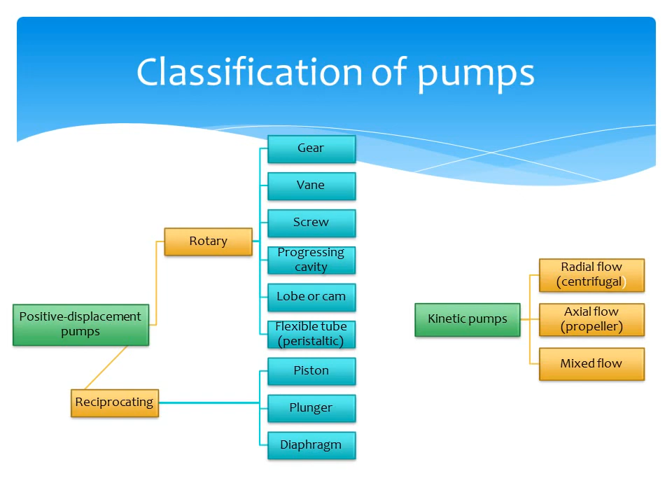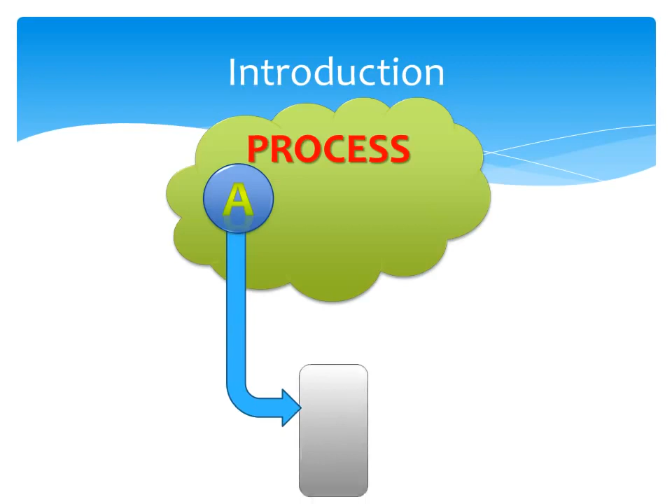The positive displacement pump is in some ways an even simpler device to control than the centrifugal pump discussed previously. It has the same function, namely to provide the pressure necessary to move a liquid at the desired rate from point A to point B of the process.

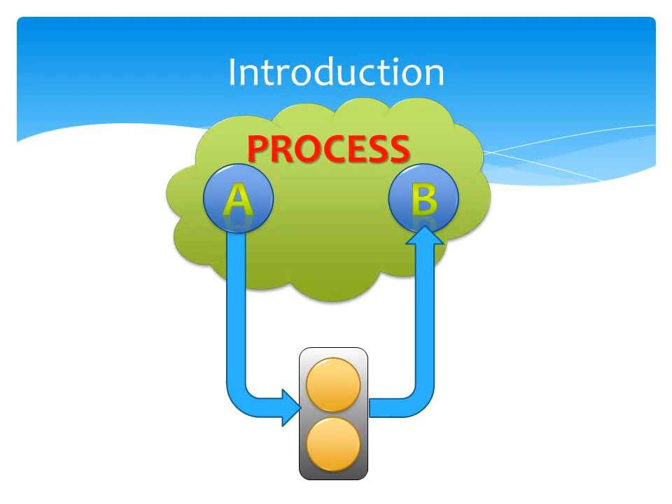The figure shows a generic process with a positive displacement pump connected to deliver liquid from A to B, in this case a gear pump.

Their characteristic curve is so simple that it is rarely drawn. The point at which the system curve and the pump performance curve intersect is the condition of operation. Typically, a system curve will require higher pressures for higher flow rates.

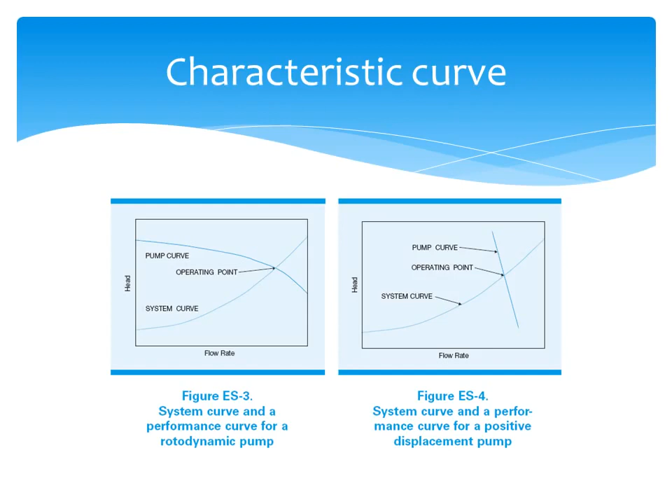Centrifugal pump performance has reduced flow with increased pressure. The slopes of the two curves are opposite. If the slopes are both gradual, the angle of intersection will be small.

Minor variations of resistance to flow, such as a partially clogged strainer or valves, will shift the point of intersection over a range of operation.

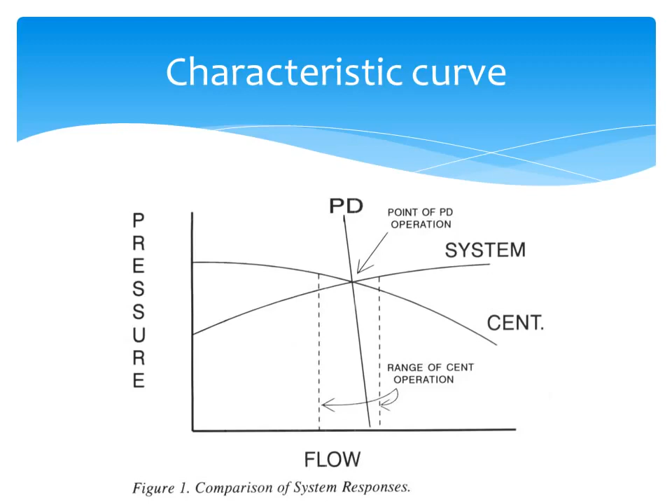PD pumps have a nearly vertical performance curve and, therefore, always intersect the system curve at one point. Minor variations in system resistance do not alter the flow.

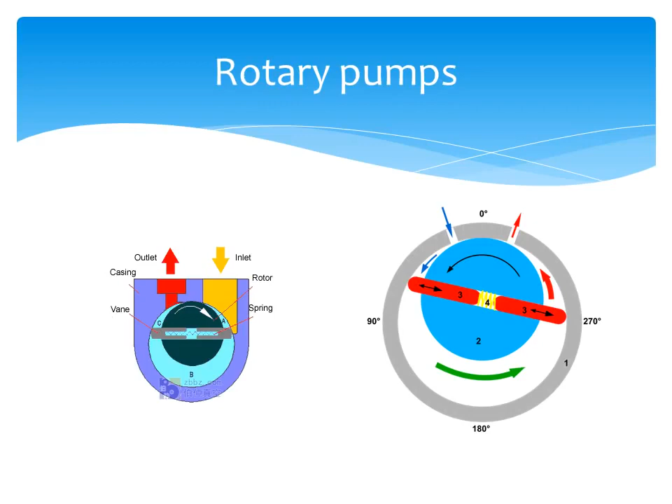Rotary pumps are defined as being vane, piston, flexible member, lobe, gear circumferential piston, or screw pumps. In all of the rotary designs, the chamber is created progressively through rotation of the drive shaft. There may be one or more chambers opened per revolution depending on the design.

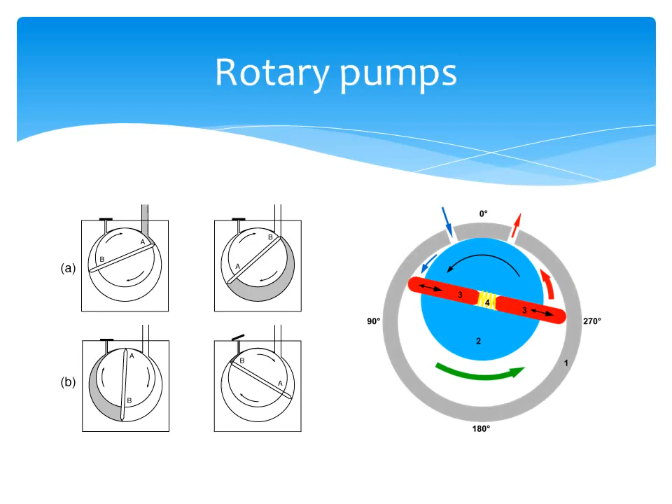The chambers are sealed off from suction by close clearance between the rotor and the housing, or by close clearance between intermeshing rotors. Rotation of the shaft moves the chamber along the bore or housing towards discharge.

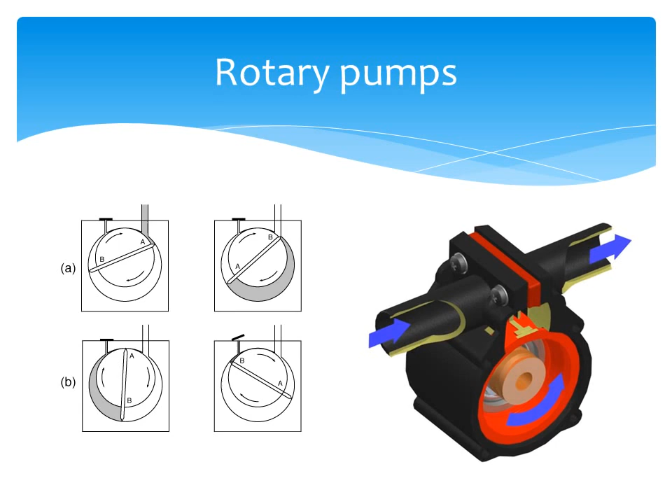The chamber is displaced to discharge by rotation. The release to discharge progresses with rotation, as the volume is expelled so that the flow is typically pulsation-free.

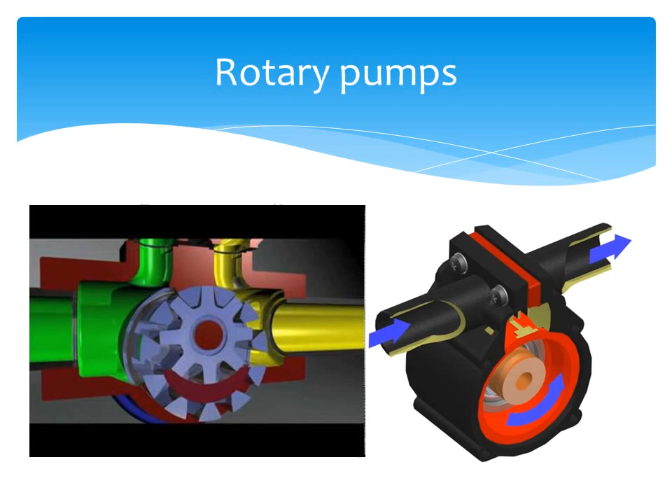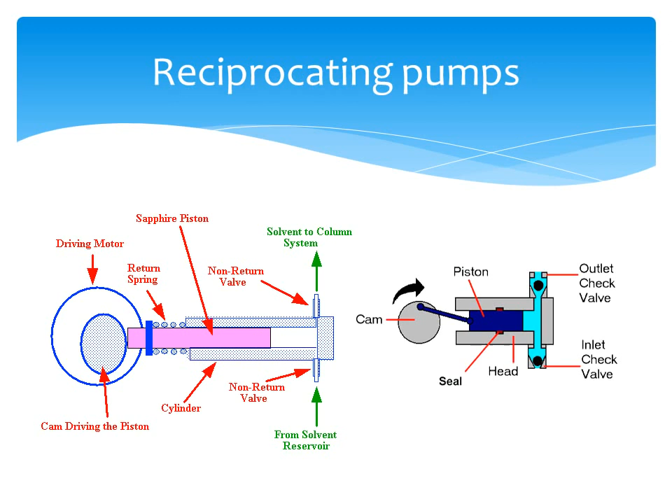Reciprocating pumps are defined as being steam, power, or controlled volume pumps. In all reciprocating pumps, there are check valves on the suction and discharge. Fluid flows through the suction valve and into the chamber as the plunger, piston, or diaphragm recedes.

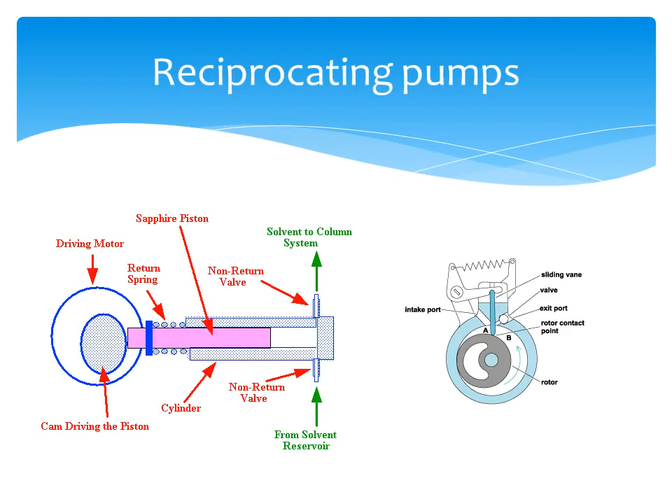At the end of the stroke, the chamber is at its maximum size. The suction valve closes, the plunger moves forward into the chamber, forcing the fluid out the discharge valve.

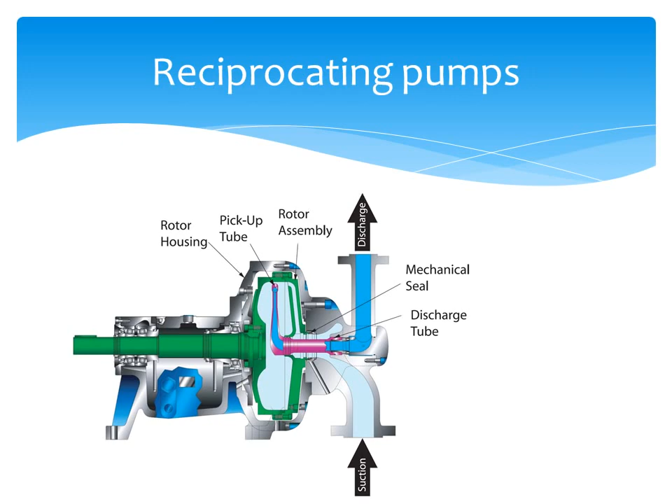The flow from each chamber is a pulse flow. If the pump has several chambers, they are timed to have sequential pulses, to minimize the overall pulsation.

As the gears rotate, they separate on the intake side of the pump, creating a void and suction, which is filled by fluid. The fluid is carried by the gears to the discharge side of the pump, where the meshing of the gears displaces the fluid.

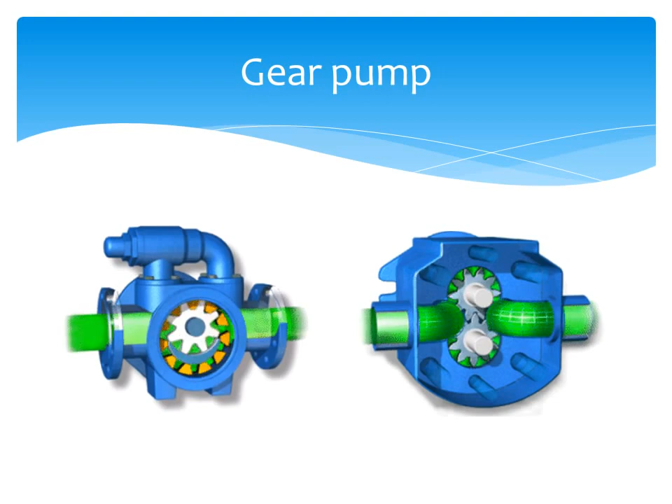The mechanical clearances are small, in the order of 10 micrometers. The tight clearances, along with the speed of rotation, effectively prevent the fluid from leaking backwards. The rigid design of the gears and housing allow for very high pressures and the ability to pump highly viscous fluids.

Lobe pumps are similar to external gear pumps in operation in that fluid flows around the interior of the casing. Unlike external gear pumps, however, the lobes do not make contact. Lobe contact is prevented by external timing gears located in the gearbox.

Pump shaft support bearings are located in the gearbox, and since the bearings are out of the pump liquid, pressure is limited by bearing location and shaft deflection.

As the lobes come out of mesh, they create expanding volume on the inlet side of the pump. Liquid flows into the cavity and is trapped by the lobes as they rotate.

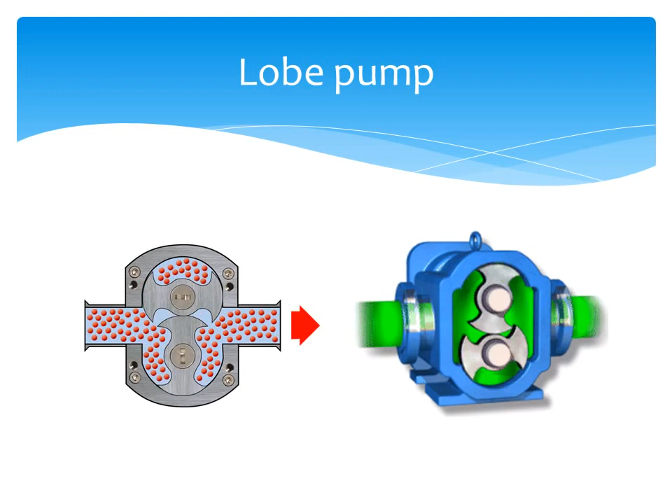Liquid travels around the interior of the casing in the pockets between the lobes and the casing. It does not pass between the lobes. Finally, the meshing of the lobes forces liquid through the outlet port under pressure.

A screw pump is a positive displacement pump that uses one or several screws to move fluids or solids along the screw's axis. In its simplest form, the Archimedes screw pump, a single screw rotates in a cylindrical cavity, thereby moving the material along the screw spindle.

This ancient construction is still used in many low-tech applications, such as irrigation systems and in agricultural machinery, for transporting grain and other solids.

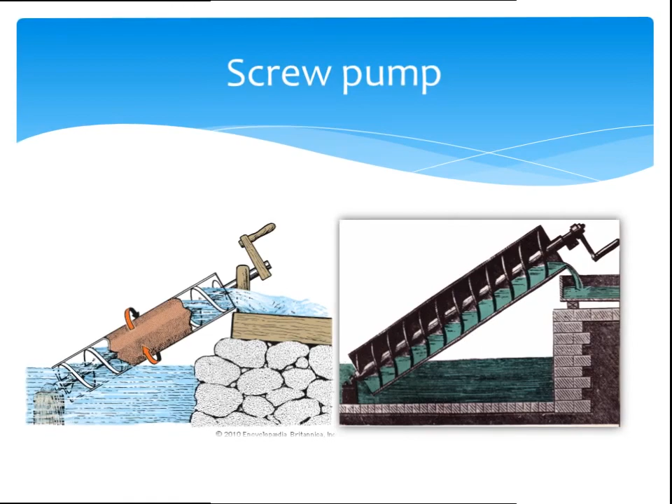The simplest vane pump is a circular rotor rotating inside of a larger circular cavity. The centers of these two circles are offset, causing eccentricity. Vanes are allowed to slide into and out of the rotor and seal on all edges, creating vane chambers that do the pumping work.

On the intake side of the pump, the vane chambers are increasing in volume. These increasing volume vane chambers are filled with fluid forced in by the inlet pressure. Inlet pressure is actually the pressure from the system being pumped, often just the atmosphere.

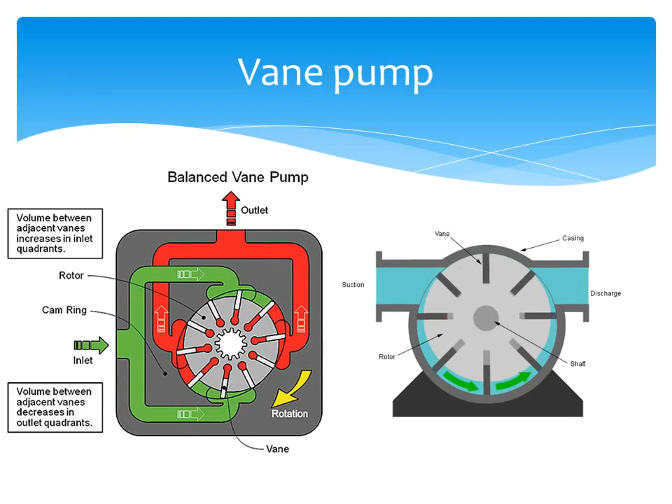On the discharge side of the pump, the vane chambers are decreasing in volume, forcing fluid out of the pump. The action of the vane drives out the same volume of fluid with each rotation. Multi-stage rotary vane vacuum pumps can attain pressures as low as 0.1 Pascal.

The fluid is contained within a flexible hose or tube fitted inside the pump casing. The actual pumping principle, called peristalsis, is based on alternating compression and relaxation of the hose or tube, drawing content in and propelling product away from the pump.

This process makes a peristaltic pump an accurate dosing pump or metering pump, with an equal amount of liquid dosed each time. The liquid being pumped never comes into contact with any moving parts, because it is totally contained within the reinforced hose or tube.

A rotating shoe or roller passes along the length of the hose or tube, creating a total seal between the suction and discharge sides of the pump.

As the pump's rotor turns, the sealing pressure moves along the tube or hose, forcing product to move away from the pump and into the discharge line.

Where the pressure has been released, the hose or tube recovers, creating a vacuum, which draws the product into the suction side of the pump, the priming mechanism. Combining these suction and discharge actions results in a self-priming positive displacement pump, the peristaltic pump.

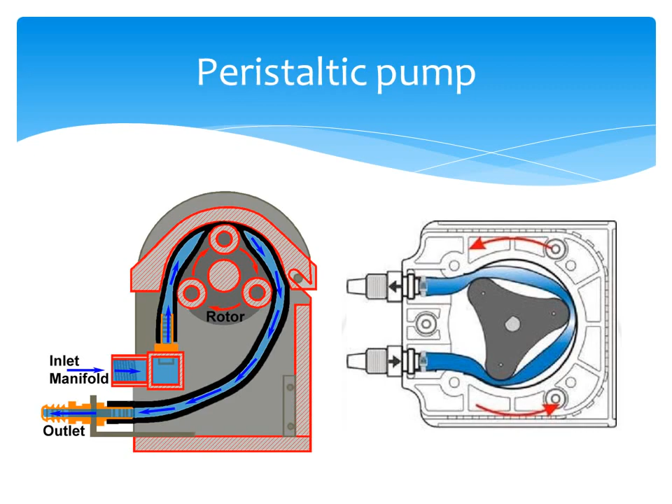An axial piston pump has a number of pistons, usually an odd number, arranged in a circular array within a housing, which is commonly referred to as a cylinder block, rotor or barrel. This cylinder block is driven to rotate about its axis of symmetry by an integral shaft that is, more or less, aligned with the pumping pistons, usually parallel but not necessarily.

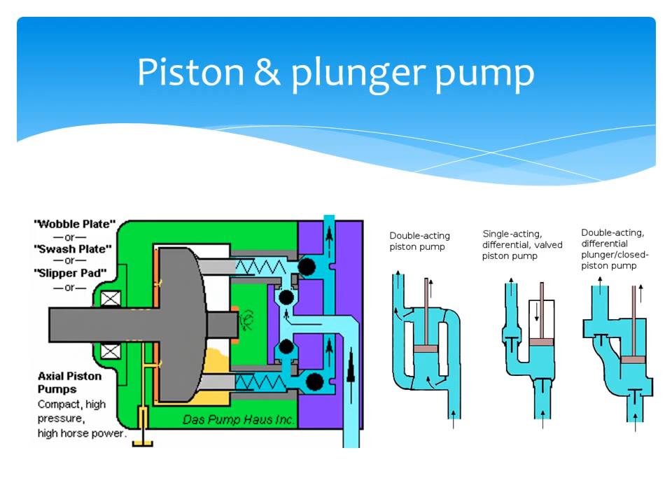A diaphragm pump or pneumatic diaphragm pump uses a combination of the reciprocating action of a rubber, thermoplastic or Teflon diaphragm and suitable valves either side of the diaphragm to pump a fluid.

When the volume of a chamber of either type of pump is increased, the diaphragm moving up, the pressure decreases, and fluid is drawn into the chamber.

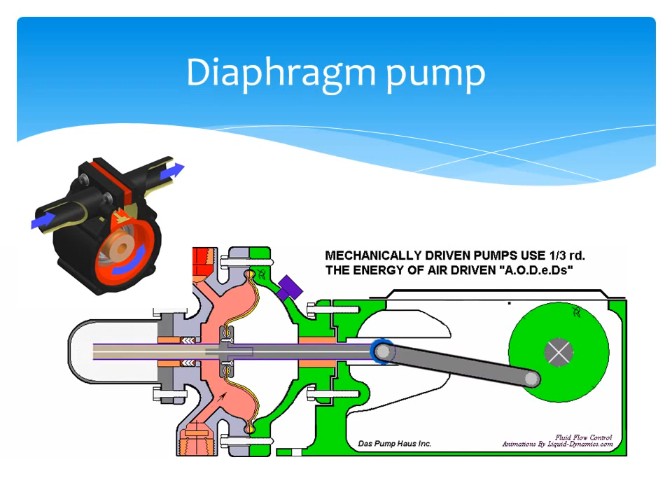When the chamber pressure later increases from decreased volume, the diaphragm moving down, the fluid previously drawn in is forced out. Finally, the diaphragm moving up once again draws fluid into the chamber, completing the cycle. This action is similar to that of the cylinder in an internal combustion engine.